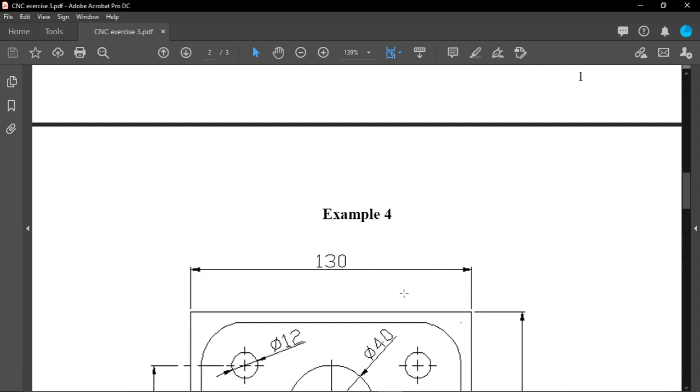Here we are going to do example number 3, and you will find example number 4 which needs to be done by you. Example number 5 is a bit complicated, so we'll deal with it in the third session, the third lab, since it's quite similar to the gear pump. We'll be drafting the SolidWorks file or the part file in this session.

So we'll start with example number 3. As you can see, this part can be done simply, it's not a complex part, so we'll start with the part file.

As I said in the previous session, make sure to draw this in the simplest way that you can. So the dimensions are 130 and 90.

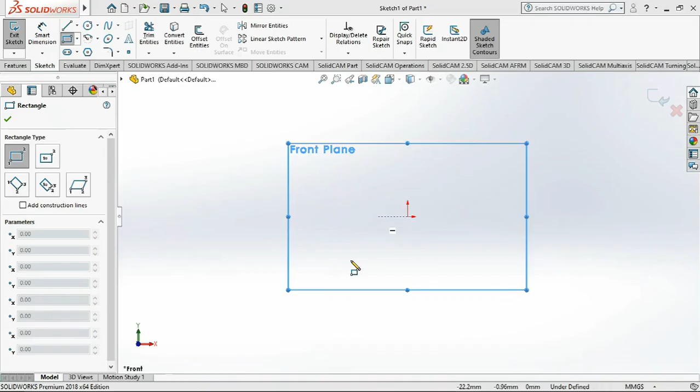So, center rectangle, dimensions 130 — make sure always to check the units. Here it is in millimeters, and this side is 90.

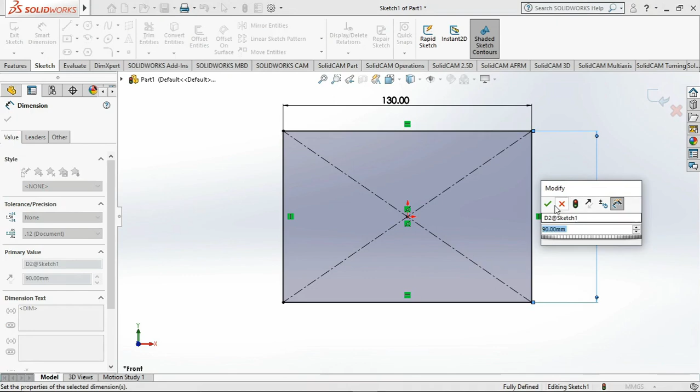Okay, that's done. So we'll find the thickness of it — it's 20. So we should extrude it to 20.

That part is done. So we'll have to have a reference plane now in order to proceed with the next features. So, coincident.

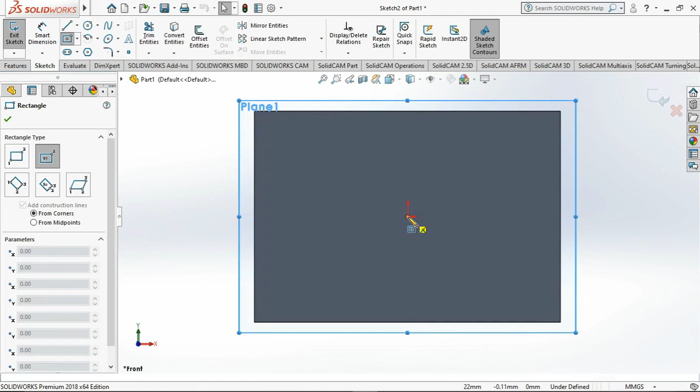And then here the dimensions are not given, but we'll go with 10 millimeter deductions from the length and from the width, right. So the sketch will be 120 and 80.

Even the fillet is not given, so we'll take it as 15 as in the previous examples. So, fillet — keep it to 15.

Okay, and then we have to extrude it as well — it should be 2 millimeters. So this entire part here is having a thickness of 2 millimeter, and the top part is having an additional 3 millimeter, which adds up to 5 millimeter.

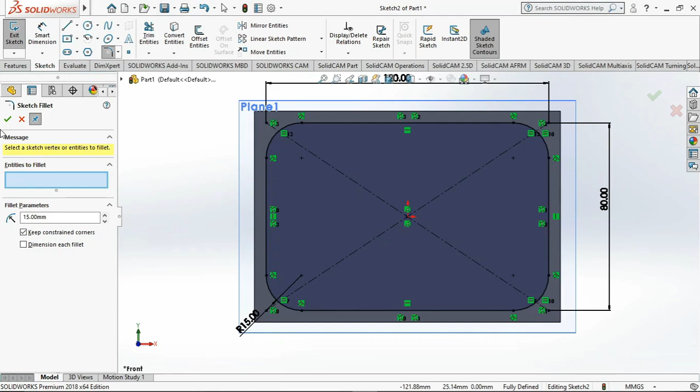So make sure in every drawing that you do, to recheck twice, since the dimensions could mislead you. So this is done — extruding to 2 millimeter, right, that's done.

So then another reference plane, since it's another feature on top of the second feature. As you can see, they have given the dimensions for it — it is center circle first at radius 20, and then this part is a 16 rectangle.

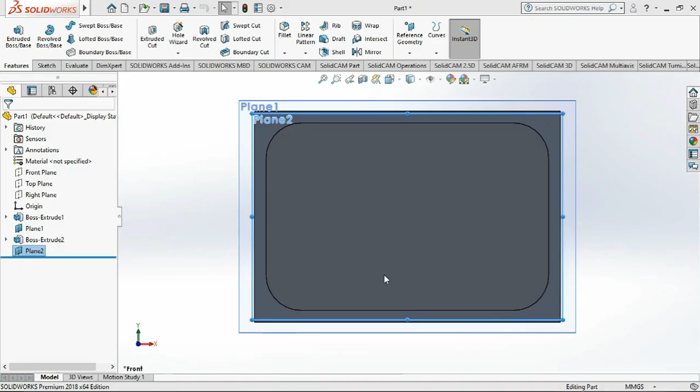So we'll sketch this, a radius of 20. Okay, and then a rectangle of 16 — this length should be 16. So it's a matter of trimming.

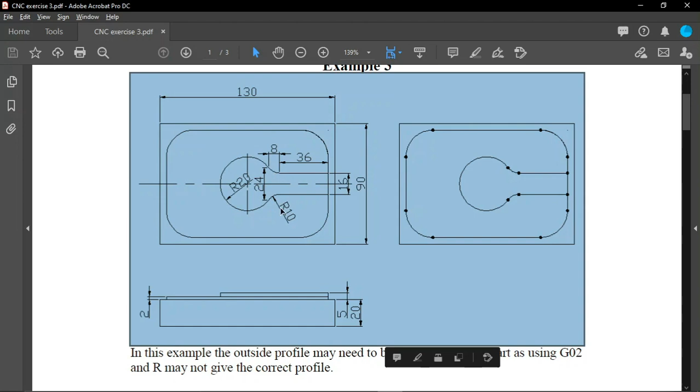So this is okay, but there is another thing to be concerned about — there is a small fillet going on from here with a radius R10. Fillet, okay, so this is okay.

And as you can see, it is a 3 millimeter height of extrusion. So it's 3 millimeter.

So now the part is done. As you can see, this is the part given in the sketches here. In this example, the outside profile may need to be completed in two parts, as using G02 and R may not give the correct profile.

So the outside profile — you can see here there are two outside profiles. This is one part, the inner part, and there is another profile coming onto this, the border. This border is another part, another profiling. So we'll go on to this.

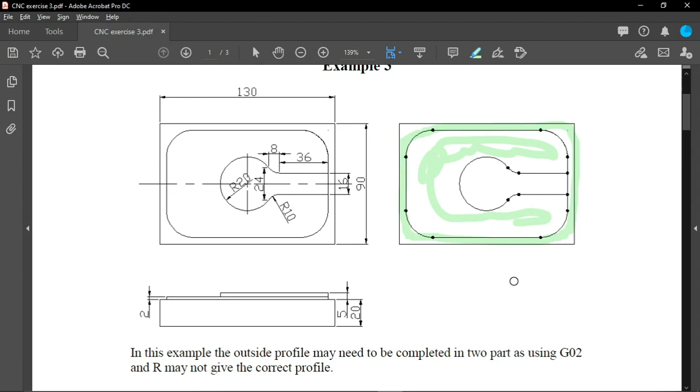So make sure you save this. There are no fixtures, no operations.

You can start with the face milling. If you have gone through the first video, you know why face milling is done. So the face milling is okay.

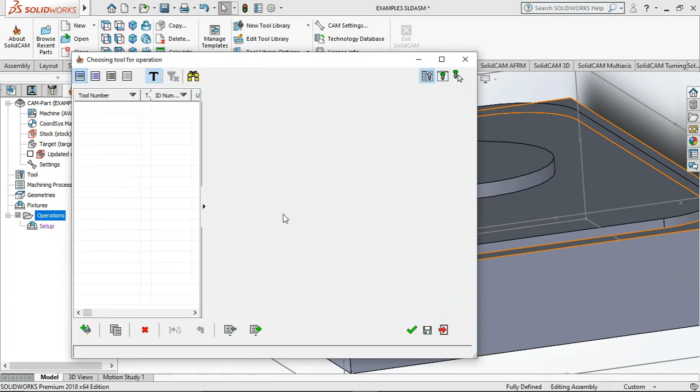The same coordinate system — you have to select the tool, create the new tool, and it is a face mill. Since they haven't given any tool selections, we can go with our own. So I would prefer having the diameter 40 as a face mill.

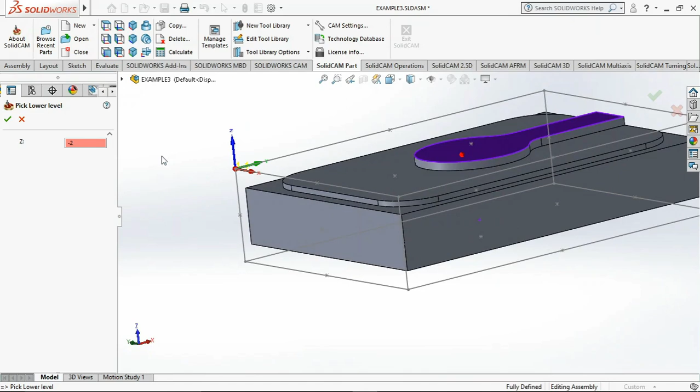That is a standard tool. And the levels, of course, are already defined, but you can user-define it again — upper level, which is the 0th coordinate, and the face depth is this, that is the part that is facing, having the highest point actually.

So having that, you can go to equal step down, which means the face mill will go on an equal level distance — step down. So we'll select the hatching technology, which means the hatching path, the machining, so the floor finish we can give it here. There are more features to be given, but we'll go on with this first and see how the machining is done.

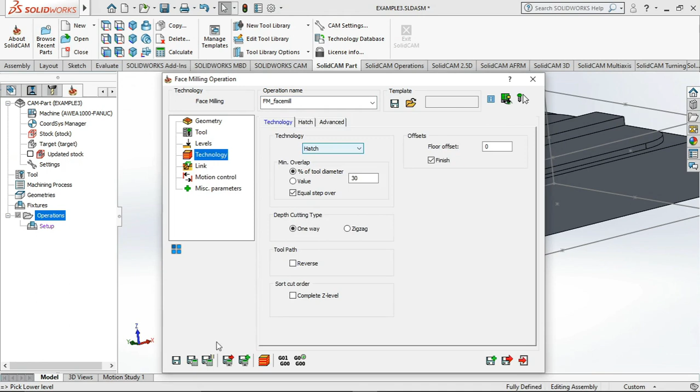Right, so that's not an issue. So to show the rest material, we can see it has already done the machining here. So in the rest material we can see now the part can be seen, so that the facing has been done properly, right?

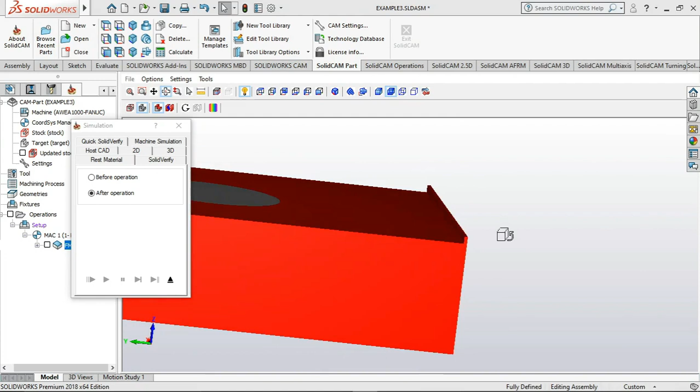But there's a small thing that needs to be done, right? As you can see, there's a small part left. So to cut that rest material, we can include a rest material option, or else we can straight away edit the machining again.

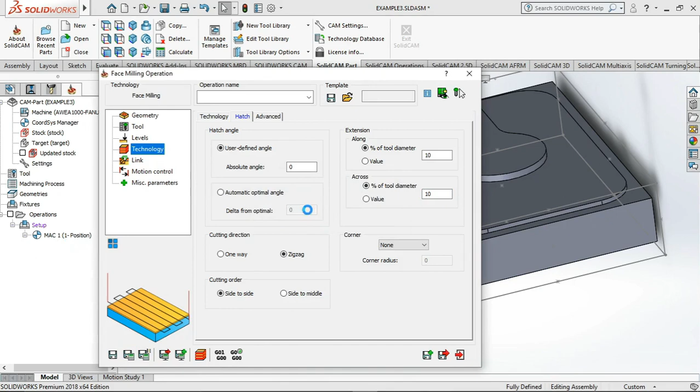So here, of course, you can go to this across. So the not along in the sense that this will be moving this part. So the across distance actually can be changed, as you can see at the below left corner. So the tool diameter will have it as 10. Calculate this and then have this here.

Right, so now there is no remainder here. The rest material, of course, you can see now it's done. So the first part is okay, this is fine, and then next another operation, which is the first profile.

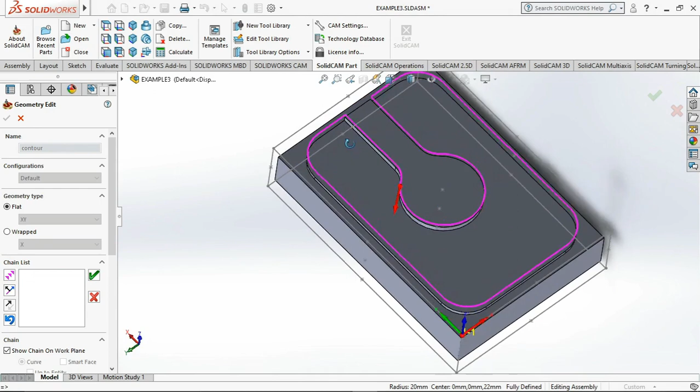So since this is a new operation, we need to assign the coordinates and the cutting path. So we have to select this. So please do not select it like this. Do not select it like this, and this will cut, but there will be remainders at these corners, acute corners, or 90-degree corners, there will be some remainder.

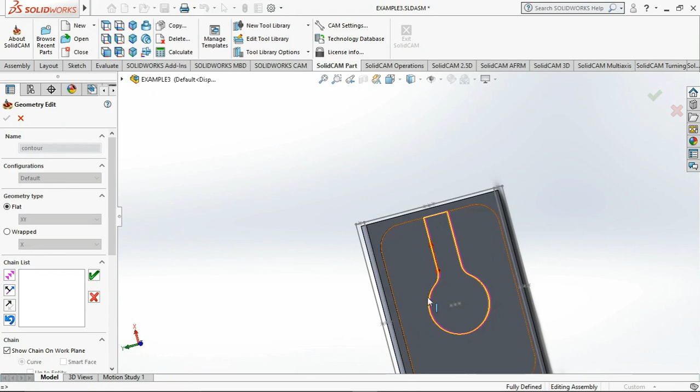So we are not going to do that. So we'll be machining this part. So you can select the direction of the cut, so that is why you can change the direction here. First accept, do not accept it, and then change the direction. If you accept it as okay, you cannot change any. So you can set up the direction. So as I said before, clockwise operation. It is going in clockwise, so now it's okay, yes.

So that is fine. The part that needs to be cut is selected, and we can give the depth. So selecting this as wall, what is the radius? It's 10 here, so it will be machining in this way, here, and this, starting from this point.

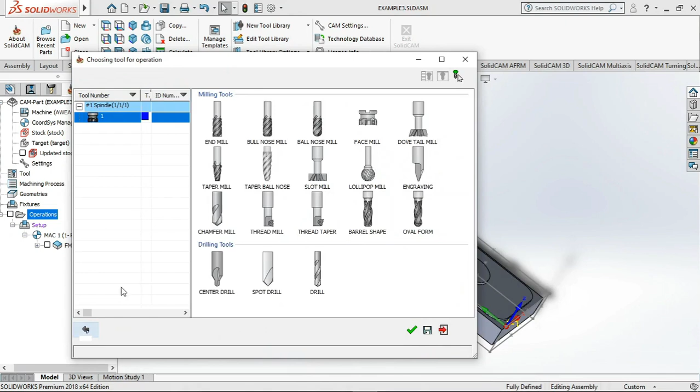So we have to assign this point first as the corner position or the offset. So we'll assign a new end mill, an end mill with, say, since this is...

Yes, the radius here is 10. We can go with the 20th tool, or else we'll anyways go with the middle in between 10 and 20, so we'll go with 15. Okay.

So here you can assign the size, right? The depth is this.

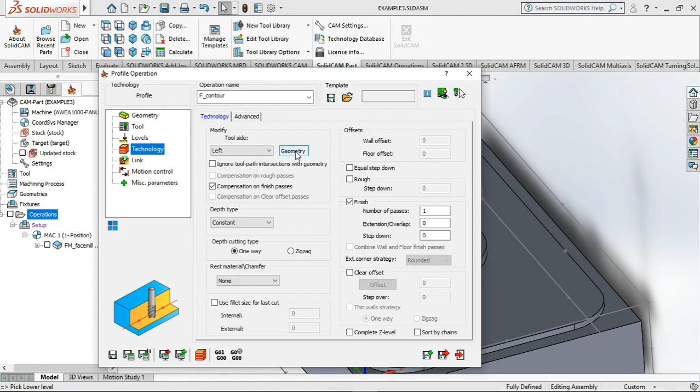And going on to the technology, you can see the geometry, how the machine or the tool will be moving, so it will be moving out from the out of the feature, so that there is no harm done to the feature. So it is okay.

Depth, you can use it as constant or helical. We'll go with the constant here, and first of all it should be rough. So the first pass will be rough, and then it will be finishing. Actually, when we are machining, the initial machining would give out a rough surface, or not a fine surface. So in the second pass only we'll be doing the polishing part or the finishing. So we'll take the rough and the finish as well.

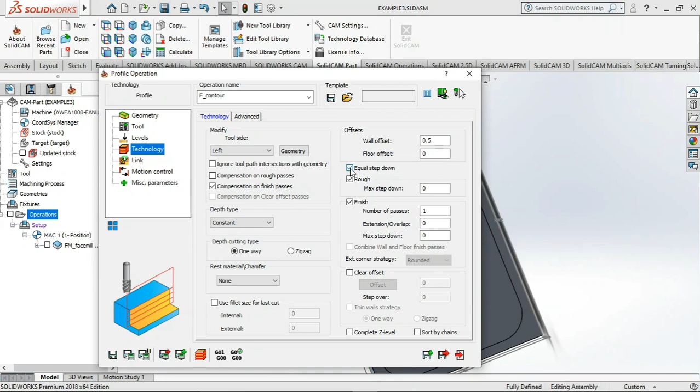So we can use equal step down, that is an option. So the rest material, this is not the rest material part, this is the original part that is cut. So we'll go with this, and the ramping.

As I said in the first video, it is explained. Now we'll go with the same as feeding. And then the lead in and lead out, you can have the same. So these are okay.

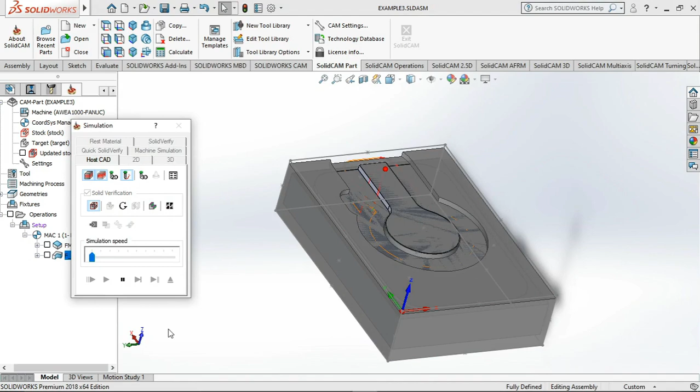To the machining, so this is the part that was cut, because we haven't given the offsetting value. So now we are going to give the offsetting value here. Clear offset, click the offset, and then you can give the coordinating part, the coordinates. So the step over, you can have the step over around we'll try 10.

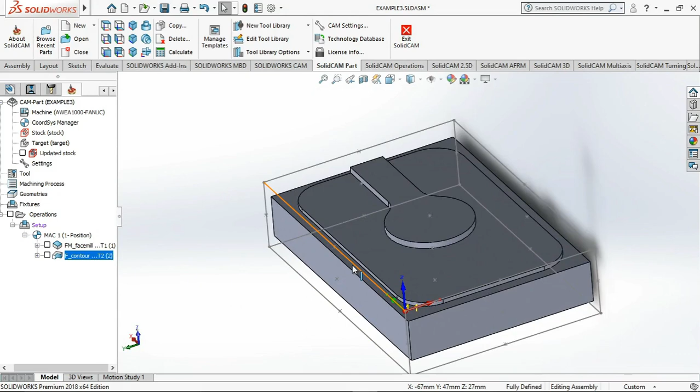And the final pass, so solid rest material, now you can see the first two features are done. So this is okay. We'll accept that, and then of course we have to have another profile cutting here, which is this part.

This area. So same as that, we can have another profiling.

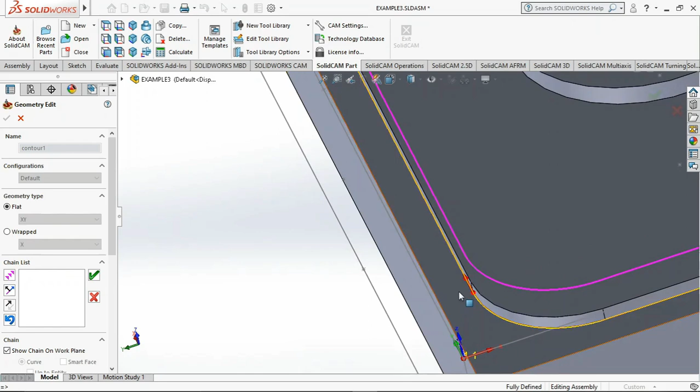Since the levels are different, you can copy paste and give different levels as well. Anyways, we'll be going with a new geometry here. First, just see where the part is moving. Yes, it is pointing towards the path, clockwise, so it is okay.

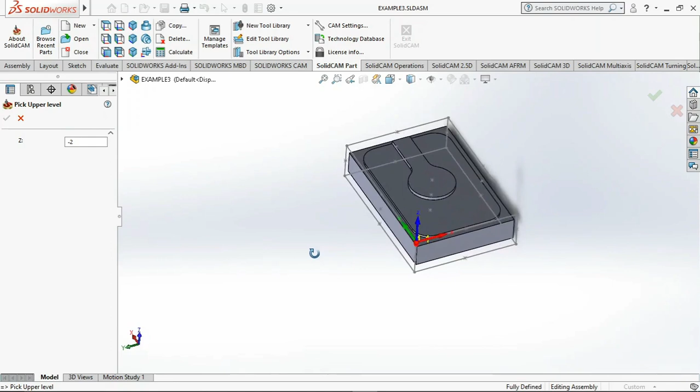Then for the tool, we can go with the same tool, so the machining would not be that expensive. If you have a bunch of various tools, the machining would actually cost more, because for each and every machine operation you have to use a different tool. Having the same tool would reduce the machining setting time as well as cost, since time is cost here.

So the technology here, the geometry, you can see it is moving out of the feature. This is okay.

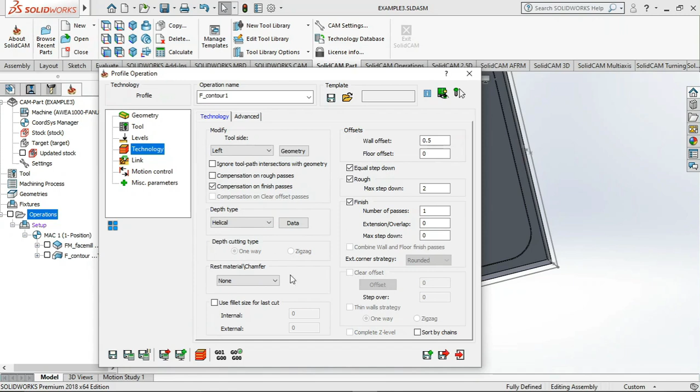Rough, equal step down, constant will use as helical. Now it will be going in a helical path, and this is okay. So same as this, we can also use helical here.

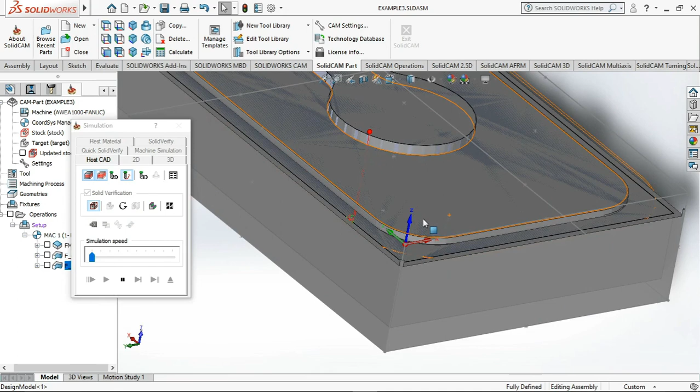So here you can see there's a small error we have done. You can just use ramping as rapid or feed, because the helical here is mostly used for boring. It will be cutting at one place and then moving on to others, so it would take much more time. Here you can use this instead.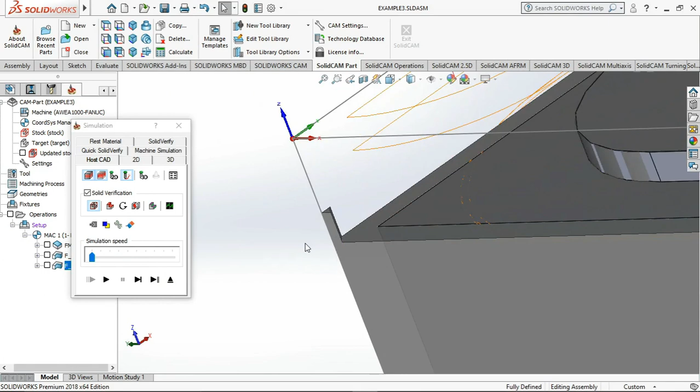Now it is done, but there is a small remainder of rest material at the corner. So here you can go to the technology, and we can adjust - this was 0.5, so now we can have 1 or 1.5 as the wall offset, so that it will move and offset a bit given the specification, and then start the machining.

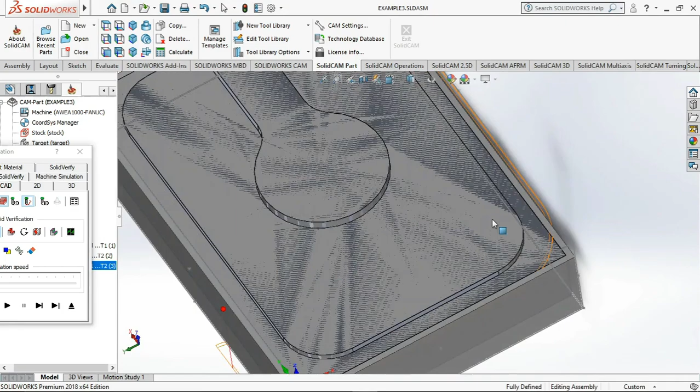With this we can try, calculate, and then simulate to see. There was a small offset here. So now there is no remainder at the edges. By checking the rest material you can verify there is no remainder at the corner.

So this is done. Now, machining, what is the next part? Forget this part, the outer boundary - that is also a profile. So are we going to cut it directly to this point?

No, because at the end we will anyway be fixing this to a machine vise. If we are going to machine this fully, it would interrupt the machine vise and the process would be false. So in order to prevent that, we'll first machine halfway down, having a small clearance to get from this part.

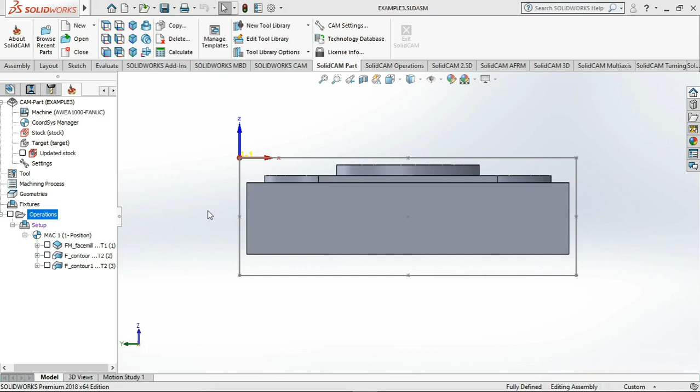So we'll go to milling operation, and here is another profile. The same tool can be used, but here the coordinating system is again - we'll see whether it is in the correct position. It is moving the other way, so we can shift the direction from here, and this is okay to go.

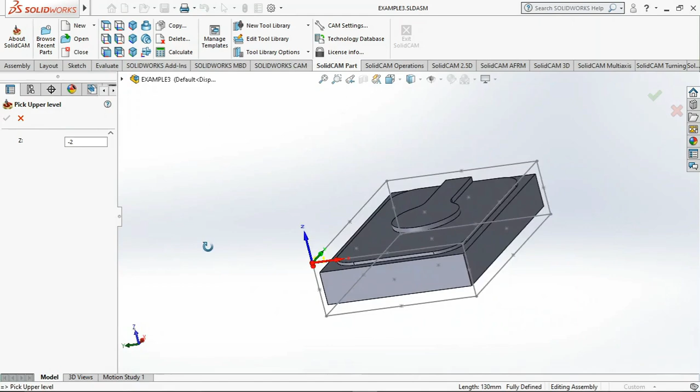Then go to the tool and select the same tool that was used before. And the levels, you can define it again. Anyways, you have to use a define because it will cut throughout if you haven't given the correct depths. So the starting depth is this, and the profile depth is around here.

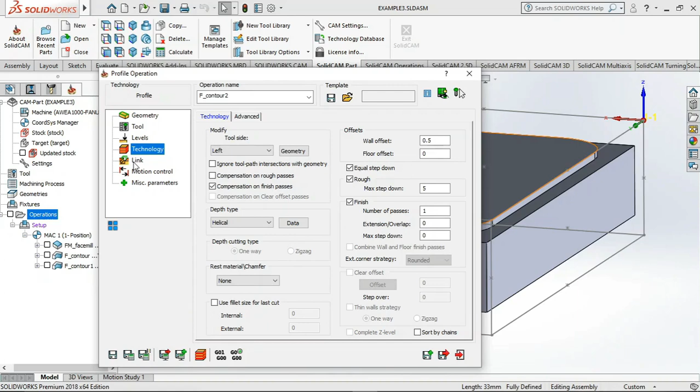This point it was 16 from below, so this is allowable. The geometry, if you want to check, moves out of the feature. Then the rough pass equal step down, and you can use helical here again, meaning that it cuts down as a helical motion.

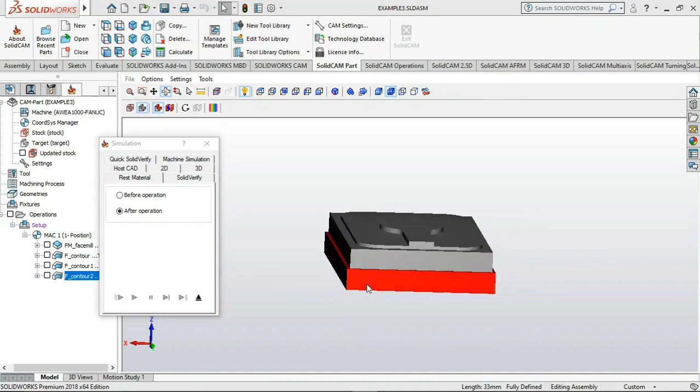We'll see, so we can simulate this. It is going down as a helical path. Now you can see from the rest material it is machined to the expected levels. So now this operation is done.

Now of course we have to rotate this part in order to machine it from bottom to top. This is the bottom surface, bottom to top. We have to align this, rotate the part, and machine again from a new coordinating system. So operations and milling - first of all we have to do the facing.

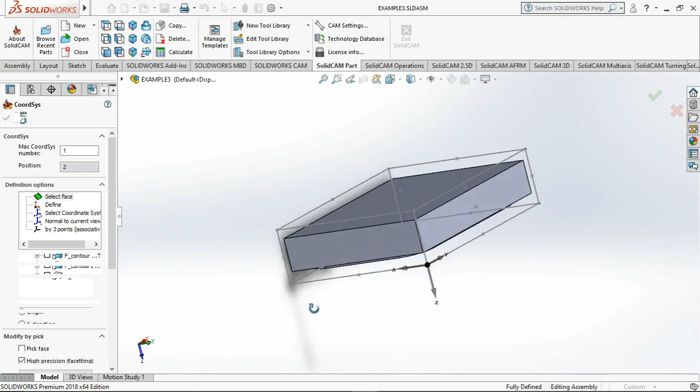So here, the coordinating system, you have to go to the coordinating system, and then add a new coordinate. Select the part first, then it automatically selects. So pick origin and this - this is the height of the stock. You can flip this around Z, so that it aligns according to our requirements. So this is all set.

Okay, here's face milling, right? So define. When you select define, it automatically selects it, right? So this is okay. And then the tool, you can select the previous facing tool here, right?

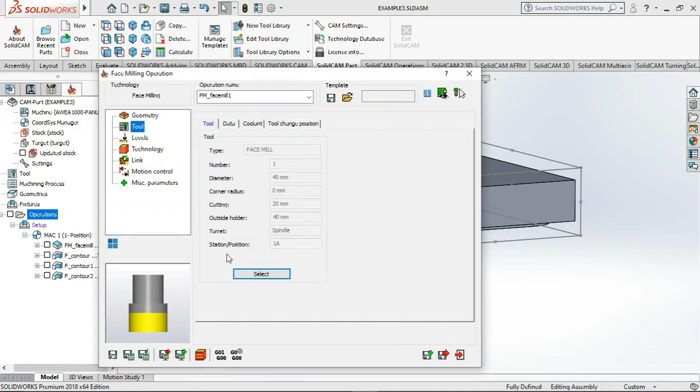Levels, you say define it from this place, right? So it's 0 to the face depth. Okay, so you can use the equal step down. We'll have an equal step down here. Hatching motion, contour, go with the contour. Alright, finish.

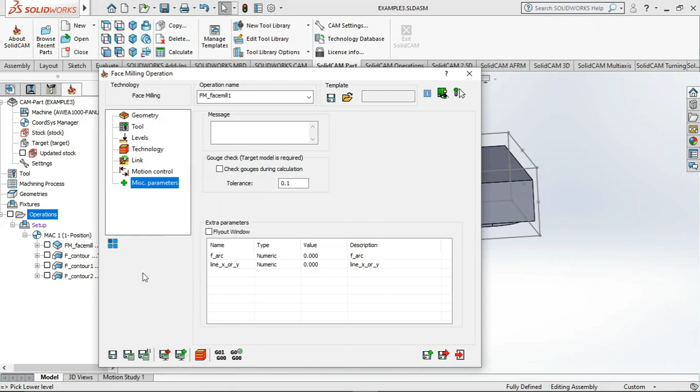Right, we'll calculate and see whether this works. Right, so that was the final pass. From the rest material we can see this is okay. Yes, this is acceptable. Right, so that is done.

You can have another operation for the final profiling, that is out of the boundary here. Now this is mounted from the below, right? So...

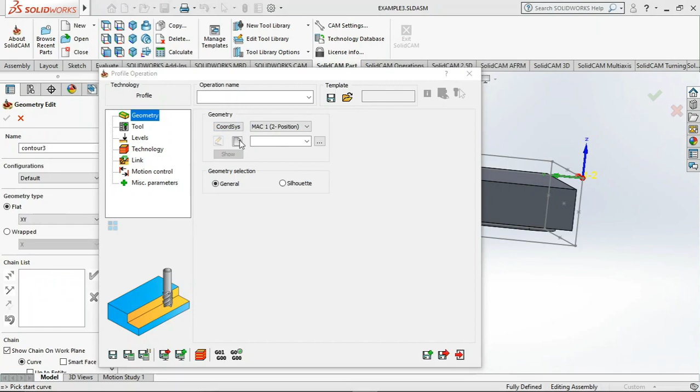I won't accept it because the direction is anti-clockwise. Here we can select it to the correct way that we need, right?

So here it should be again the position tool, right? Tool, similar, second tool here, used in the previous profiling. Levels, upper level can be given here, and the lower level, profile depth.

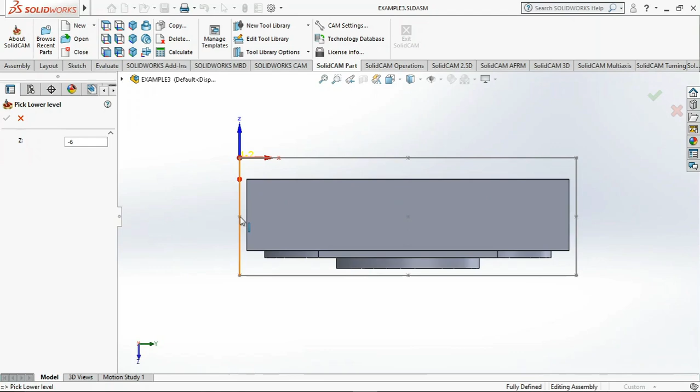We can use this posture, right? Right, so I just need to generate the G code here. Okay, so we'll calculate all again, right? So you can see these operations here, right? We'll just do a small overall simulation here, and see how it goes.

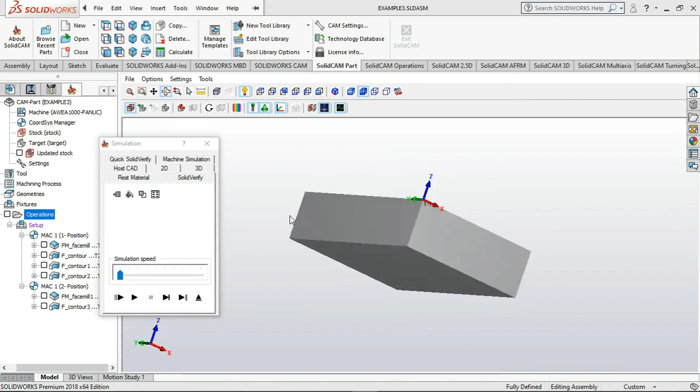Right? So SolidVerify from the block, of course we can see. Okay.

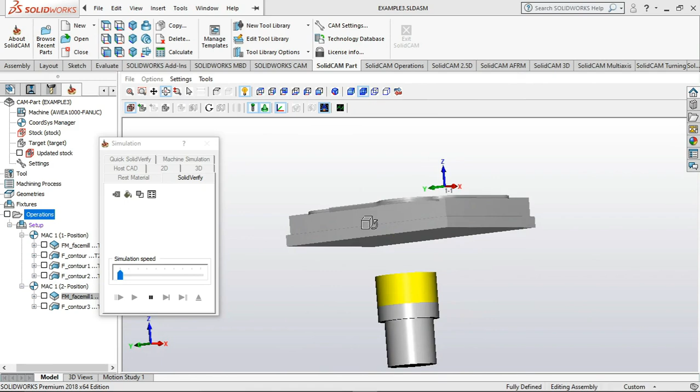Okay, so then the bottom machining, right? So it will be mounted in the other way. Okay, so this is done. So the simulation is fine. Now it is a matter of generating the G code for all, right?

So generate. Okay, so you can save this.

And example number 5 will draw this as a new part file now, right? So it looks complicated, but when you're actually drawing it, you can use the simplest methods, so that it is not that complex, as you can see, right?

So we can save this, right?

So in this part we can say this is machined from a cylinder, right? So what are the components that are visible, right? So we can see a slot here, right? 4 drills here, and in the middle a drilling, and a pocket in the middle, right? So this is...

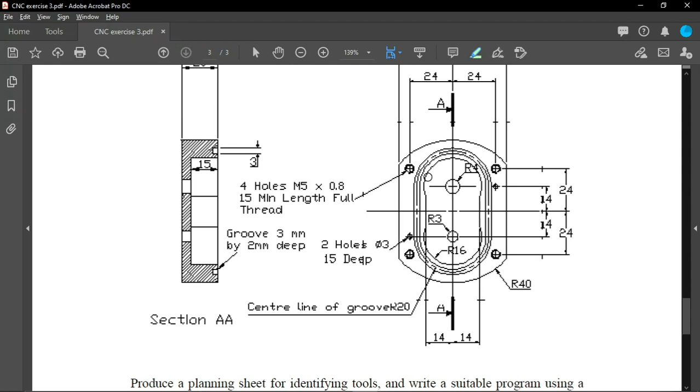Now in sketching this, of course we have to have a rectangle guide, construction guides, right? So let's start, right? Okay.

So starting with the entire circle, right? If you think of this as a circle, this would be 40, right? R40.

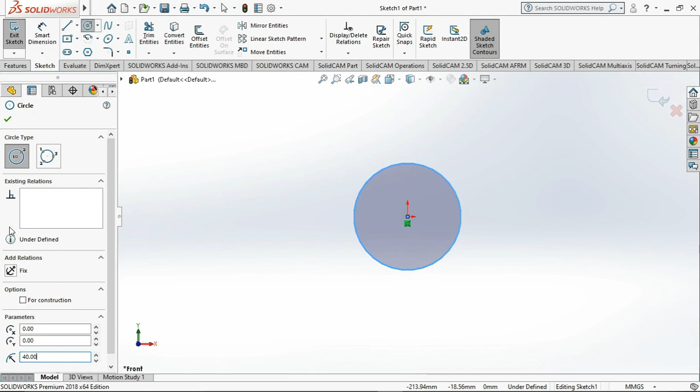Okay, and then you can see that we can have a rectangle of 30-30, right, through the center, dimension here, you can check this as 60, right? And then...

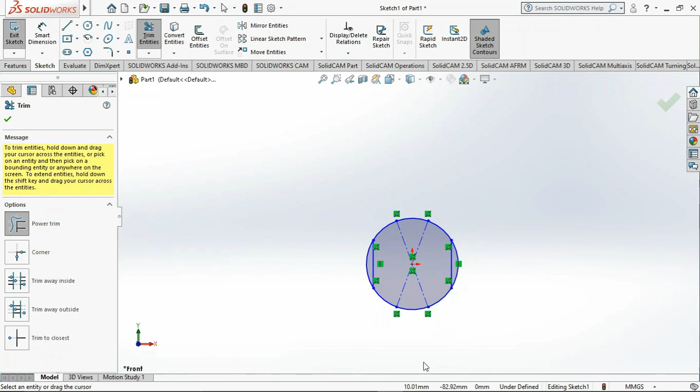You can start trimming here, right? So okay, so this is ready to extrude, yes, this part is now ready to extrude. So the size is 20, right?

So having that, then next we can start the pocket area, right? So the pocket area is somewhat a new shape, right?

So how can we draw that? Okay, so we know there are two circles, right? R16 is the radius of this, right? So...

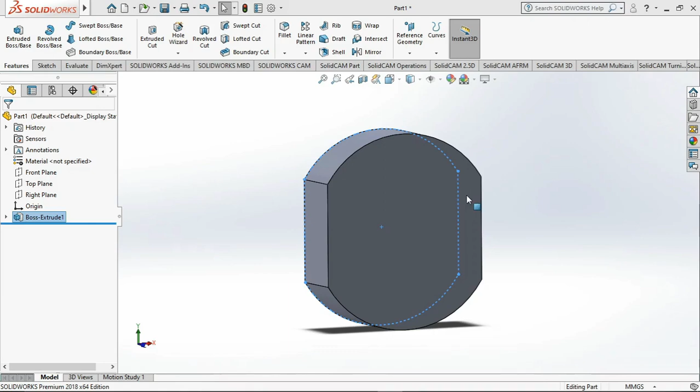Coincidence, right? Okay, you can go to this. Before that, right, as a construction, now the centers, the distance of the centers are 14, which is 28, right?

So the 28, we can draw a small construction line for that. Okay, so yes, a midpoint line would do. The midpoint line from here, so we can give the dimensions, is 28, right?

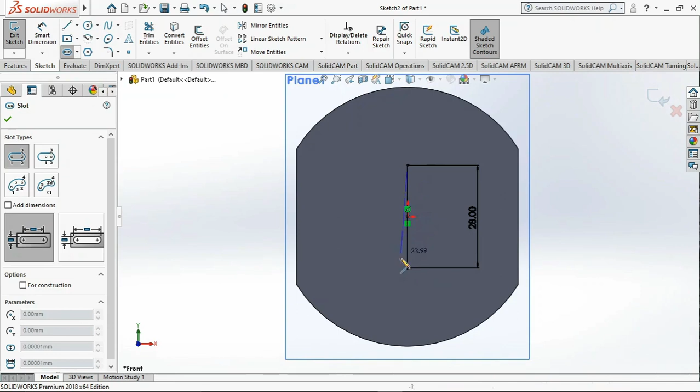Okay, and then draw this area. Just give me a second. Here, oh, rather than that, having two circles here would be easy, right?

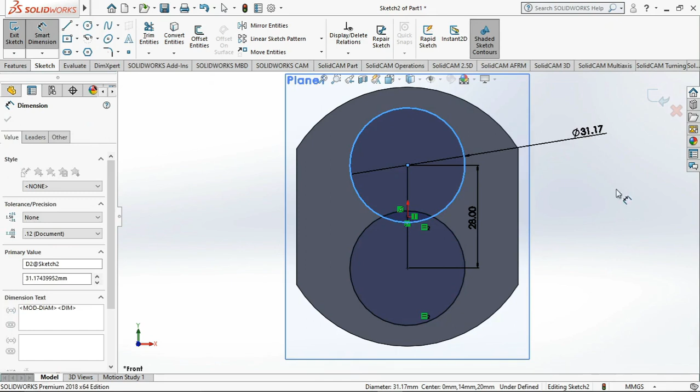So we'll go with two circles of R16. Okay, so equal these two, and then okay, and then so that is fine.

Now there is a small okay, we can create a rectangle here, right, from the midpoint. So it is 28 again, and there is one more thing to consider. So the distance of this, right? Okay, we'll move on with this for the moment, right?

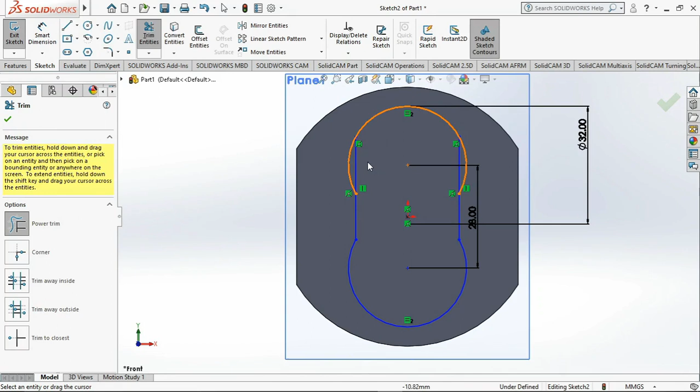Okay, and then start trimming this. So okay, so it seems...

Okay, so you can see the dimensions are okay, right? Now this is an extrude cut, right? Extrude cut of 15. So we'll cut this and see.

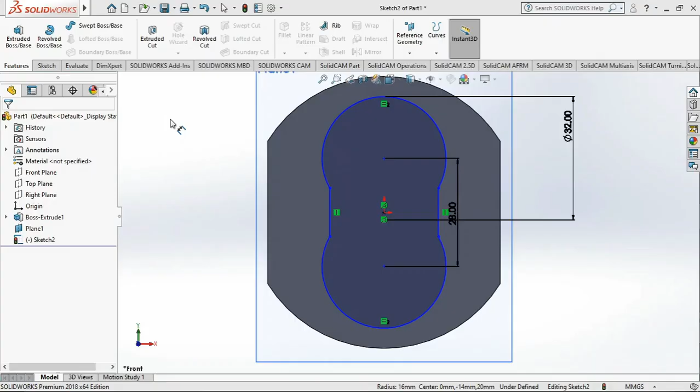Looks good, right? And then the next...

Right, so then we can drill this, right? There's a small drill at the middle of the pocket which goes through, right? So which is, we'll sketch on this itself, right? The same plane, right? Since it is going through, there is no point of having a new...

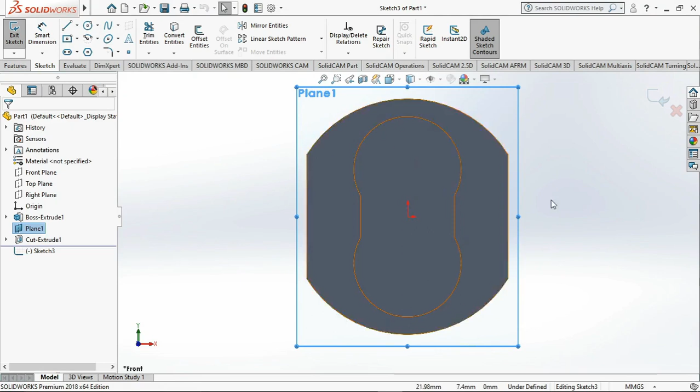We can make this visible so that it would be a guide for us, right, to get these 2 points. So here you can see it is R4 first and then R3, 2 circles, right? R4, R3, okay.

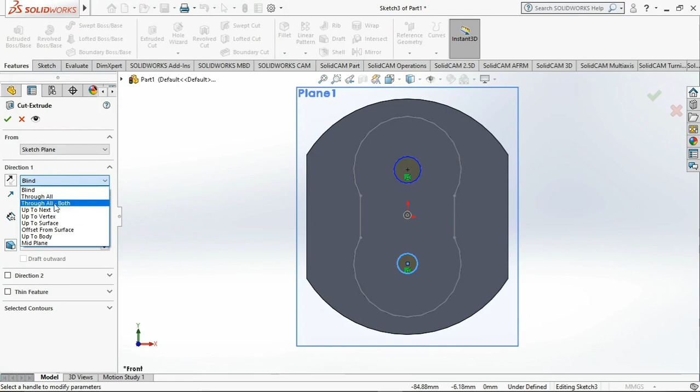Extrude cut, right, through all. Okay, so that is also done, right? So the pocket area is cleared.

Now we have 4 drill holes left and the slot of 3 millimeter, right? So first of all we'll go to the... yeah, we'll do the slot process here, right? So...

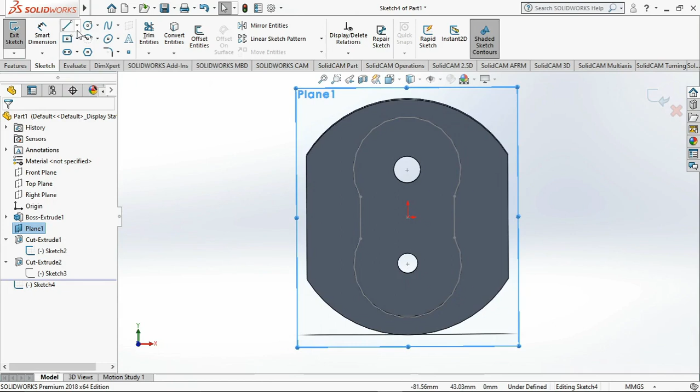We have given R20. So from the center line of the groove to this point, right, to this center and the center line, it's R20, right? So we can have the same plane here, right? So editing the same plane. Now we can get a straight slot here.

So this is the center line that went here, so it is R20, right? Okay, and you have to do a small mathematic here. So the center line will be right at the middle of this, so 1.5 up and down, right?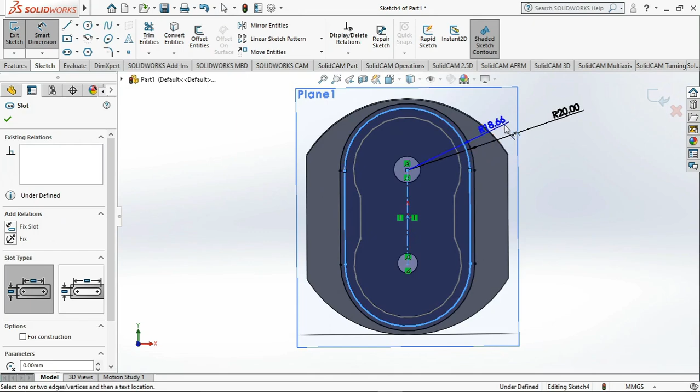Point 5. And another one, point 5, right? So we see that there is a small error here, right, compared to the diagram here, right?

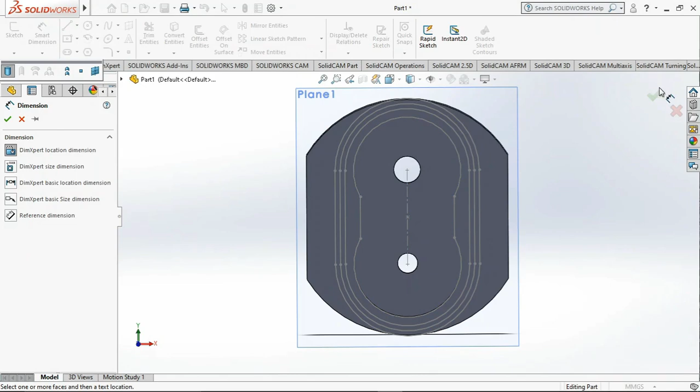So seems like the slot here is bigger than the outer radius. I will check the outer radius first. I think it has gone out of the dimensions, right? So we'll smart check this. It seems like it's 35 and it's not 40, right? So we can adjust this again, go back to the first sketch, right here, and then give this as 40, right? So seems okay now, right? Pretty good.

Okay, now we can move to the cutting, right? So there's a slot of 3 millimeter with a depth of 2 millimeter, right? It's a groove. So the sketching is done, okay, right?

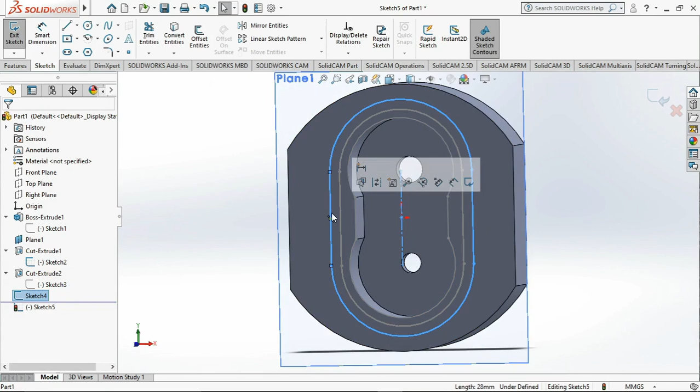Can go to extrude cut this. Alright, before that, you can delete that first centre line, right? Okay, with the sketching on, editing on, you can go to extrude cut here, and it is okay, and it's 2 millimeter in depth, right? So that is also done here, right?

In the same plane, we can go for the drilling here, right? So there are 4 holes, M5 into 0.8, 15, right, length full thread, right, 15 millimeter. Which goes by 25, 24, 24, which is 48 here, and this way again 48, right?

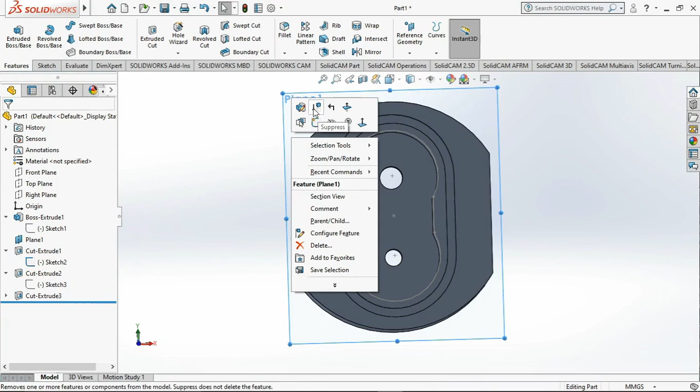So we'll give the edit this, right, edit sketching, and then have a box of which is 28, 24, 24, 48, right, 48, right? So this is

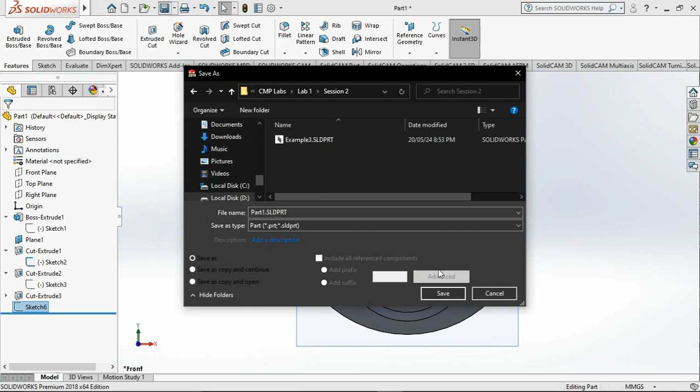None. We can have the, we can go to it says to save the document. Please make sure you save it, right? This will save it in lab 1, right? So we are doing it in lab 1. It's part 1.

So the hole wizard, right? So here we can go to hole wizard, right? And then it's a straight tap, and then it should be the standard of ANSI Metric, right? It should be bottom tapping holes, right? So the size was given as M5 into 0.8, M5 into 0.8, right?

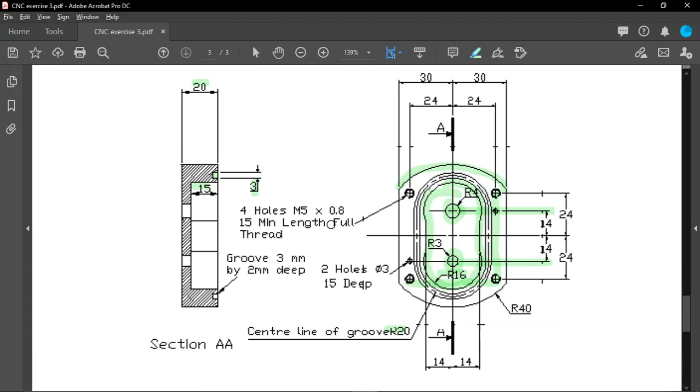So whether it is through all, this full thread, right? So they have given the length, right? So it is going to a depth of 15 millimeter length, right? The full thread, okay? It's a full thread.

So here the blind size, you can give the depth as 15 millimeter, and the thread end condition is 15 and the thread is as well 15, right? It has said the full length of thread is 15, okay? So we'll give this and save.

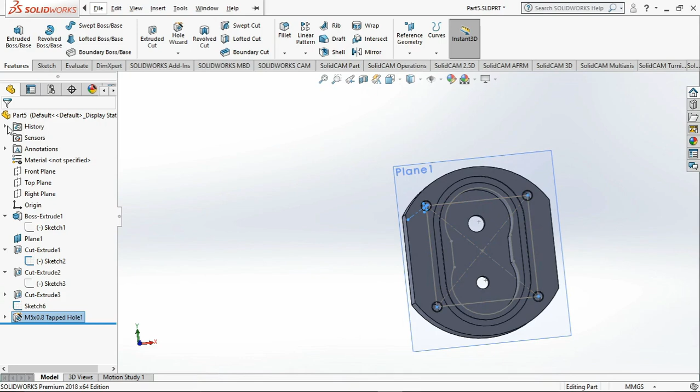So here, to have the sketch, you can have a rectangle of this here, right? So having that, it will be 48 and 28 from the center. Okay, so we can start sketching this again.

48 and 28, right? So it's fine. It's 3 millimeter diameter, 15 depth, so that is fine. Go back to hole wizard here.

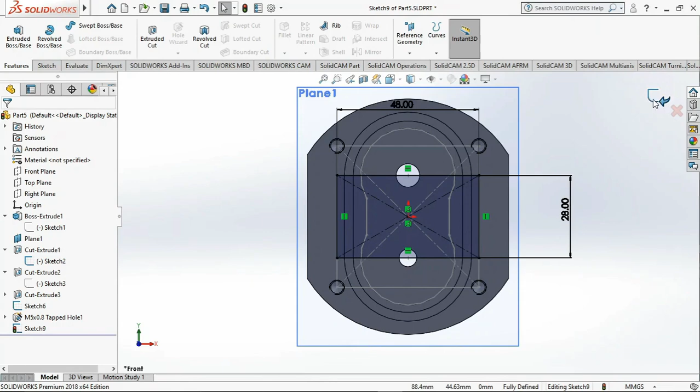Alright, just a hole here, 3, 15. Positions, there's one here and another one here, right?

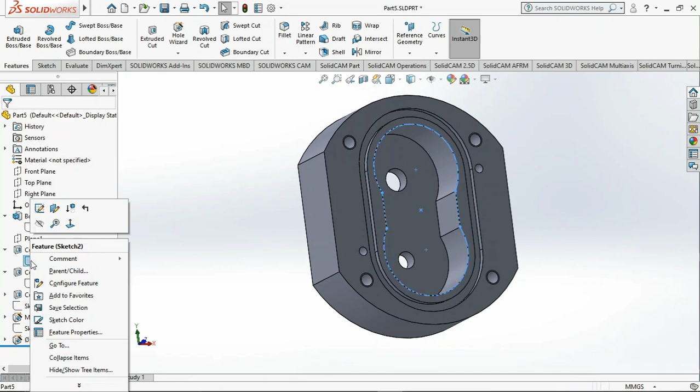So that's also done. So the part is quite, right, the sketches we can hide them. So this is the part actually which is shown from here, right? There is no much big deal about it, right? Okay, it is simple if you follow the simple steps, right?

So this, there's a small thread, there's another thread going here, right? But the dimensions aren't given in this drawing, right? So I will edit the part according to that, and there are 2 holes here and here, right? So alignment holes, right?

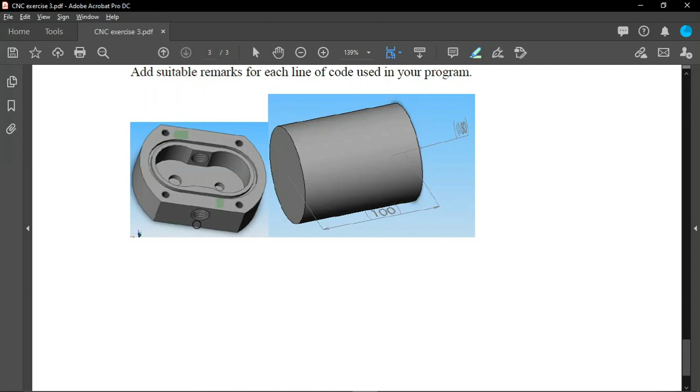We'll do this machining part, right? So the threading, I will not be doing that, right? It is not that hard, it is simple, right? Just getting a reference plane here to the sideways, and then through all drilling with the thread, right? So that is easy, and we'll do the machining part in lab 3.

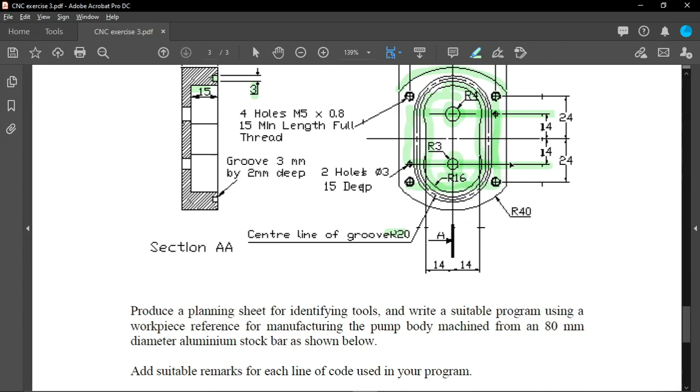Okay, so for the moment, just try, make sure you practice this, right? Okay, example 3, example 4, and start drawing example 5 as well, right? So the machining can be done for example 4 and example 3 by you, so make sure you practice this, right?